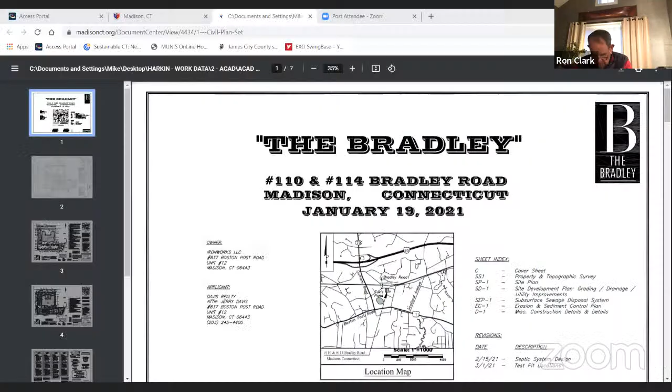So while Dave's popping that up, I'll get started on it. So we're here tonight again for the project. It's called the Bradley. It's located at 110 and 114 Bradley Road in Madison, Connecticut. The owner's Ironworks LLC, and the applicant is Davis Realty.

And as you know, we have Mr. Jerry Davis on with us tonight. The civil engineering firm of record is Harkin Engineering LLC, my firm, and the surveyor of record is Gesick and Associates PC out of Clinton, Connecticut. There is a little bit of inland wetlands on the site, and the soil scientist of record is Mr...

The project site is located where the old laundromat used to be, next to the hearth, next to the dry cleaners, across from Hammonasset Fitness in that warehouse building.

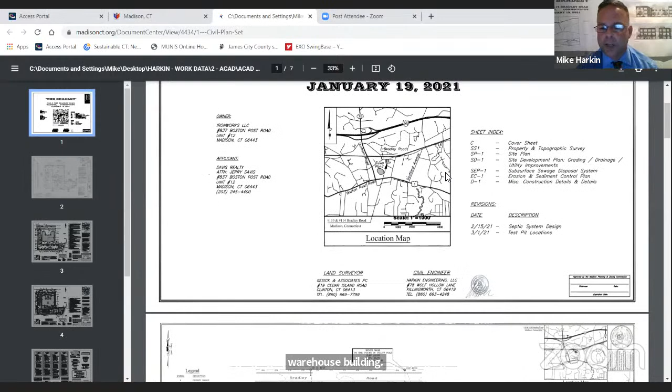If we go to the next screen, we have the site survey, which was done by Gesick and Associates. It shows the two parcels, 110 Bradley Road, directly adjacent to the hearth. You can see the outline of the hearth building on the left side, and then the rest of the buildings throughout the project site. There's a total of 4 buildings on the site right now.

They will all be demolished. The utilities and septic systems will be filled in. Because septic is the highest concern on the site, the leaching galleys will be completely removed, and the entire areas will be filled with septic sand to support the septic systems we need.

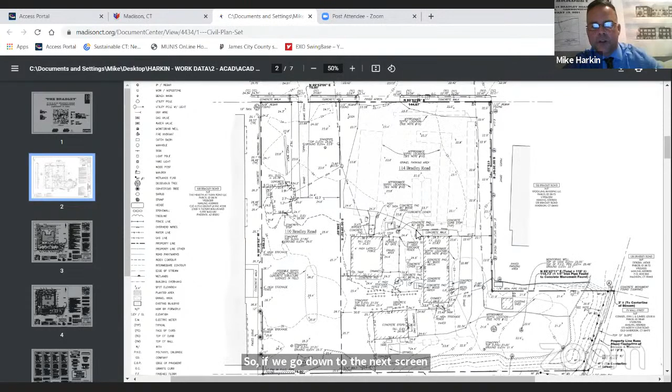To support this building, if we go down to the next screen, you can start to see our site plan. Our site, combining both 110 and 114 together as one parcel, equates to 1.43 acres, almost an acre and a half, which is quite a big lot, especially in the downtown area. It's located in the D zone, the downtown district.

For this project, I want to reiterate that we're here for a special exception. The building you see in front of you, since the Chairman had read the legal notice, was listed at 48 bedrooms. We've been going back and forth with the health department, and we're actually at 49 bedrooms now, based on the health department review.

As you can see, the building is almost centrally located on the site. The pad itself, first floor, is around 13,500 square feet. When you enter the site, you're entering on the left-hand side of the screen. It's two-way traffic, 24 feet wide, as we come off of Bradley Road. Then you'll notice as we come by, we have a small parking area with a loading space for things like UPS or Amazon.

Then you come around back, and that's where we've basically situated 90% of our parking. We don't have our parking up front. We want the artistic nature of the building to stand out. We have a lot of green space, and we didn't want to interrupt that nice vibe with all the parking, so we put all the parking in the rear of the parcel.

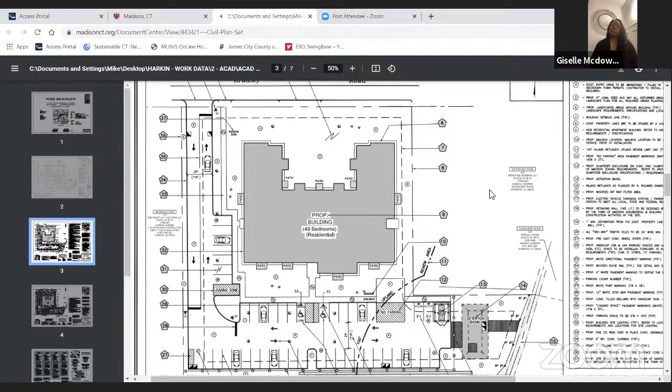As we go through, you'll see there's a sidewalk network that leads people from Bradley Road if they want to walk to the train station or just go out and about downtown. We have that interlocking sidewalk system. It's important to note that the building and site plan you see here meets all the planning and zoning regulations, the bulk standards as far as lot coverage, building setbacks, and things of that nature.

Now if we go to the next screen, this is our site development plan, and this is where you see all of our utilities.

Jerry had mentioned that the hardest part of any project downtown or anywhere on the shoreline is septic. You can see here we're supporting the building with 4 separate septic systems. Those systems have been reviewed by the Madison Health Department. Amanda has looked them over and asked us to make some changes, which we have. We've addressed all of Amanda's concerns, but because of the size of the septic system, it has to go to the state for comment, which it was sent up there. We don't anticipate any negative feedback coming back from them, but as far as a cursory review, once you hit a certain threshold, the state does have a shot to look at it. So that's where it currently resides.

If you go over to the right side of the screen, you can see where we're bringing in the gas and water lines, the utilities. It comes right down and heads to the back of the building. On the left side of the screen, we hug the building with the electrical and telephone. So underneath the ground it looks pretty tight, but we meet all the setbacks for utilities.

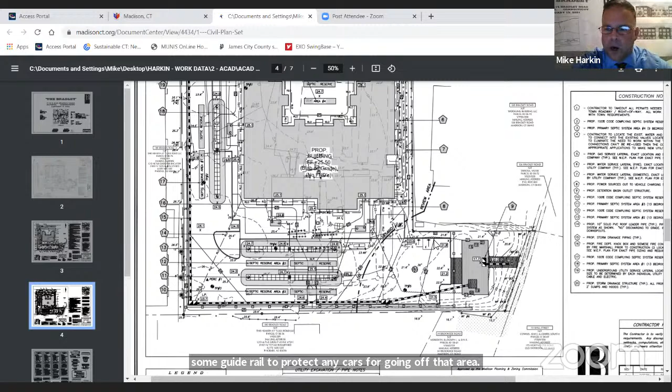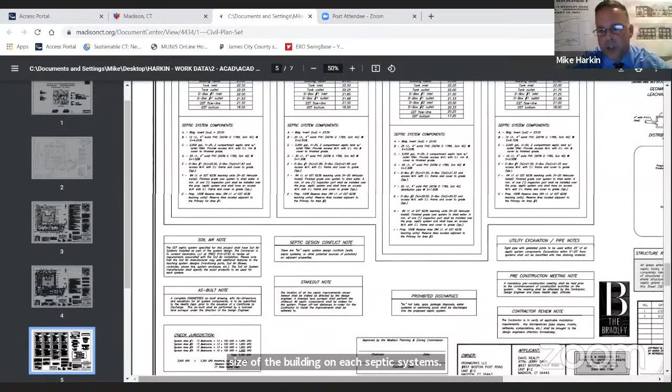If we go to the next sheet, Dave, this would be our septic design. It's a pretty thorough design based on the size of the building, with each septic system callout and physical septic type shown on this sheet. This is the sheet that Amanda and the Madison Health Department looked at and had us make a couple of small tweaks to.

The next sheet of our project plan set is the erosion control sheet. That's really one of the most important sheets in this project set. Usually it's kind of like the parsley of the plan set — there's a lot going on here.

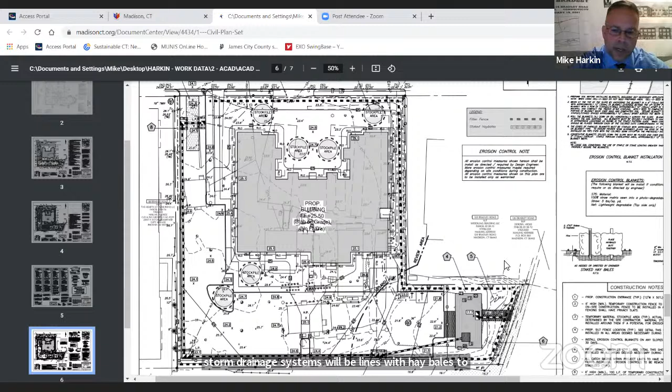Because it's in a high travel area, we have construction fence to be erected in the front and sides of the building to keep pedestrians from wandering onto the construction site. We have silt fence and hay bales located throughout — all the storm drainage systems will be lined with hay bales to keep any debris or silt from getting into the wetlands or the detention pond. We have areas for stockpiles, and a construction entrance leading out onto Bradley Road so we're not tracking any dirt onto the road.

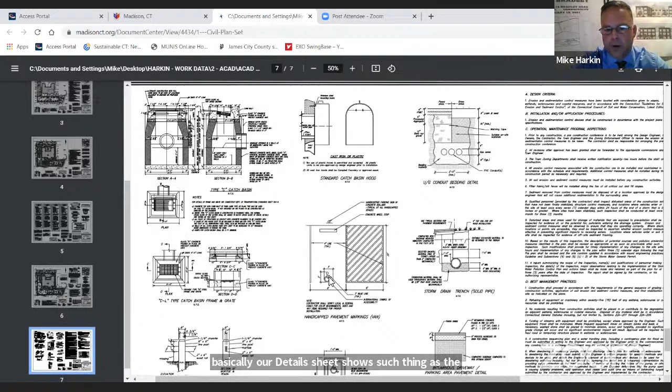Our last sheet in the project plan set is basically our detail sheet. It shows things such as the pavement requirements, handicap parking spaces, storm drainage, guide rail details, and things of that nature. Dave, if you can just go up to the site plan, which I believe is the third page of our plan set.

As you can see on our plan set, the driveway is tucked off to the westerly side of the project parcel.

I just wanted you to keep in mind, we do have our traffic engineer here to discuss the location of that. We went through a bunch of different scenarios on where to place that driveway, and this was by far the most feasible and prudent place for it, and it gave a good traffic flow through the site.

With that being said, I think the next thing to do would be to turn it over to our architect, Dan Chen. Before we do that, I just want to let you know that this project has been in front of ACA three separate times. We do have ACA approval on this building. And correct me if I'm wrong, Dave, do they get to look at this again one more time, or are we all set? No, they approved it as shown at the last meeting — they physically approved the plan set that Dan had put together.

So without further ado, I'd like to put it over to our architect, Mr. Dan Chen. Yes, hi, good evening everyone. My name is Dan Chen, I'm the architect principal with Barkman, Hendry and Archetype. Unfortunately Joe Barkman couldn't be here, and I was intimately involved with the project, so I'm happy to be here. I can start sharing my screen.

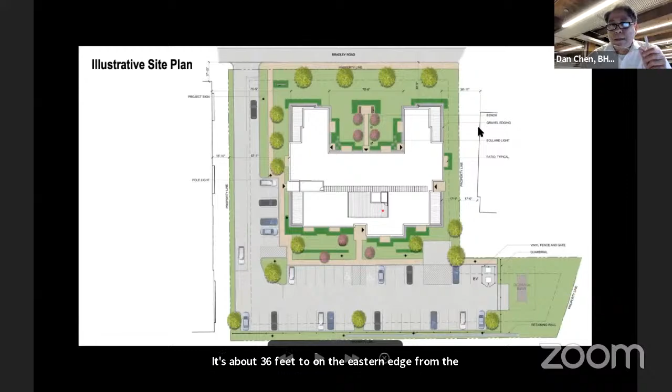As you come through, the majority of the surface parking is located in the back, along with utilities, turnaround space, and the main drop-off. The lobby into the building is from the southern side, from the parking. The building is approximately 75 feet from the nearest point of the Hearth, about 36 feet on the eastern edge to the existing 2-story retail space, and set back about 75 feet from Bradley Road to the main face of the central courtyard.

The landscaping, which our landscape architect Bill Brown will go into more detail on, is intentionally kept simple, in line with the look of the neighborhood.

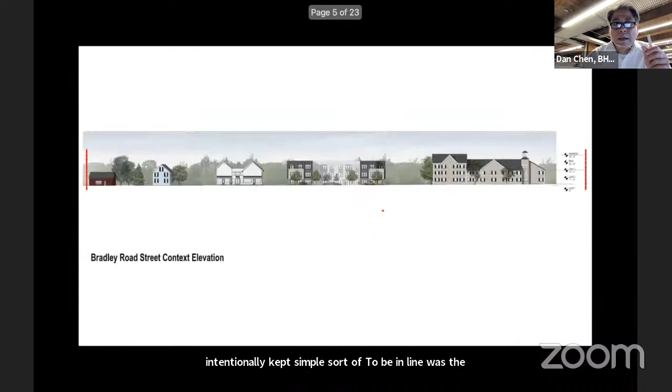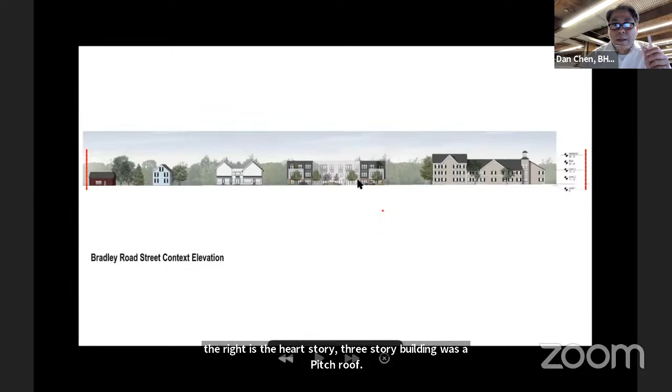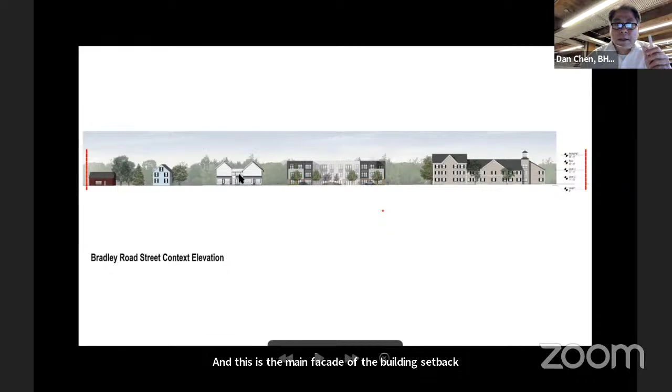This is a straight-on elevation from Bradley Road, to give you a sense of the height of the proposed building relative to the surrounding context. To the right is the Hearth, a 3-story building with a pitched roof. The proposed building has two wings, with the main facade set back about 75 feet from the property line. This is the 2-story commercial laundry adjacent, and I believe another commercial property here.

This gives you the approximate dimensions. We're 75 feet on the western edge to the Hearth, and about 37 feet to the 2-story laundry. The building width is 38 feet for the two wings, and the total width of the building is approximately 140 feet.

Some key characteristics we noted in our design approach: there's not really a definite style in this area, more of an eclectic richness and diversity, so we felt this design somewhat fits into that. The two wings break up the massing of the building facing Bradley Road, reducing it further, and the building is set back fairly far from Bradley Road.

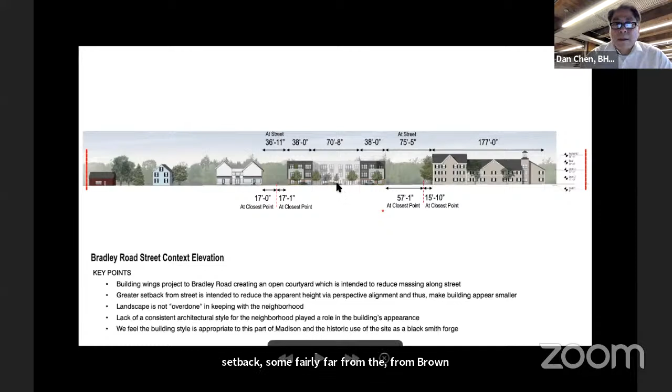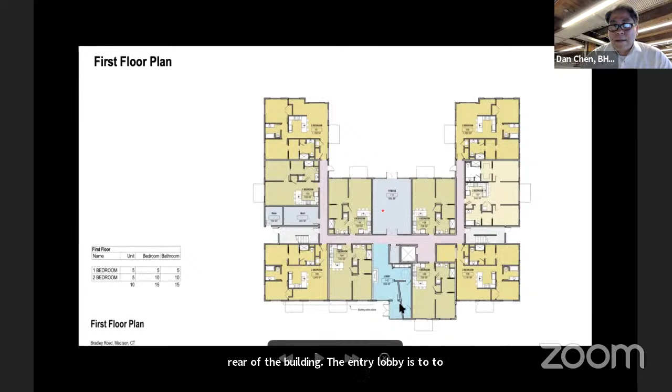I'll quickly go over the floor plan, without too much detail unless there are questions. We have 11 one-bedrooms and 19 two-bedrooms proposed. To orient you again, Bradley Road is to the north, this is the center courtyard, and parking is to the rear of the building. The entry lobby is to the south as you come in, with a community amenity space and fitness area immediately inside, which also gives access out to the center courtyard. The apartments are arranged around a double-loaded corridor.

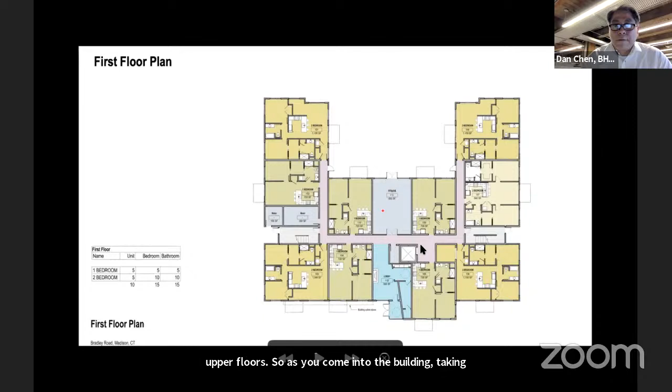The two-bedrooms are typically located on the corners of the building on the first floor, with utility and mechanical spaces to the left. The main elevators are here, along with two stairs taking you up to the upper floors. Taking the elevator up to the second floor, again the two-bedrooms are along the corners where the inside units are; these are two-story units, while this is a one-story two-bedroom, and this is the one-bedroom apartment.

As you come out of the elevator, there's a double height lobby area that you can look back down to. Many of the 2-bedroom apartments facing the center courtyard have outdoor balconies that overlook the center courtyard.

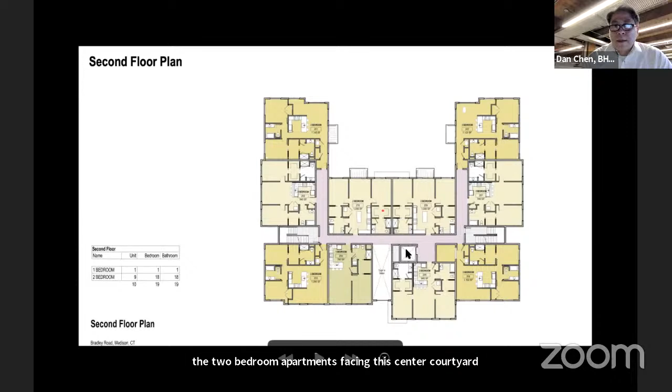As you come up further to the 3rd floor, the 10 apartments of buildings on the corners in this case are pulled back, and you will see that a little later in the 3-dimensional renderings. That creates a large patio deck for these apartments here. And the center 2 bedrooms have these outdoor balconies similar to the ones below.

There are 10 units on this floor, on each floor, for a total of 30 units and 49 bedrooms.

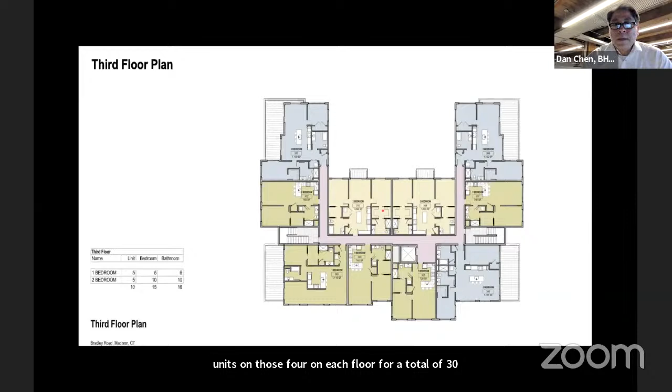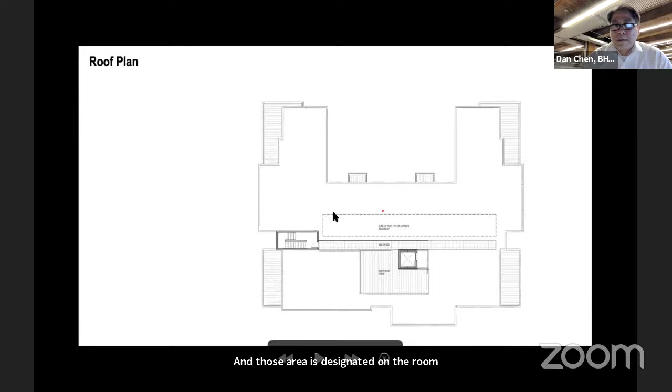As the elevator comes up, there's a communal deck of 735 square feet proposed, and one stair for the egress capacity coming up to this level as well. This area is designated on the roof for the mechanical equipment to service this building. These are pulled back from the edge of the building such that it further reduces the height and the visual impact to the surrounding neighborhood.

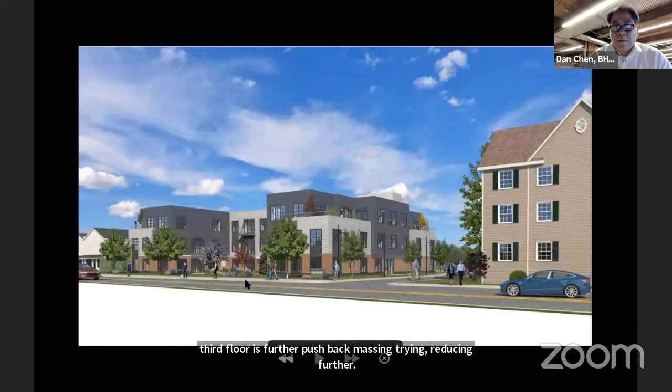As you can see, the third floor is further pushed back, reducing further the impact to Bradley Road. The center courtyard is over here, and the material here is trying to use a blend of different textures, materials, articulation and massing, interlocking volumes to reduce the mass of the building, and that is really the purpose of this design.

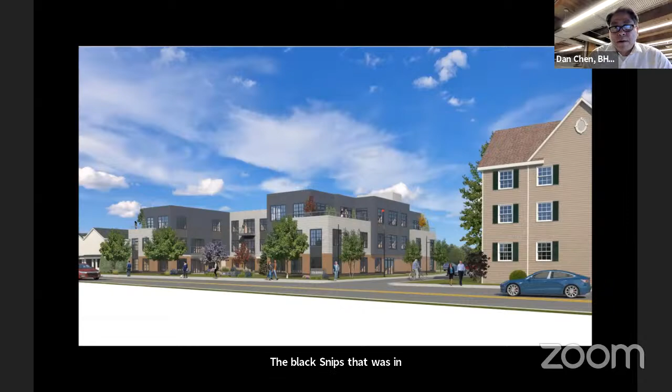The larger windows sort of harken back to the blacksmith that was on the site before, and since the intended crowd is sort of young professionals, we want to keep this light and airy.

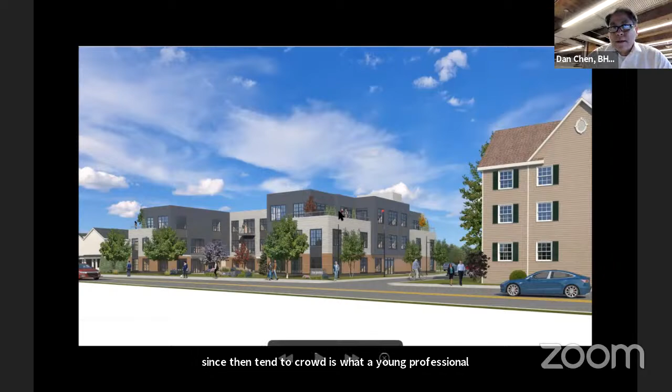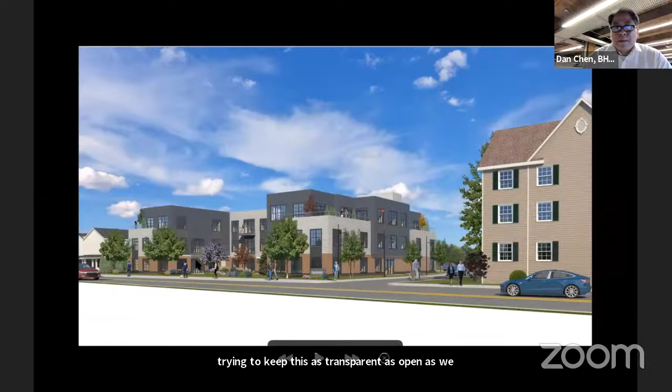The outdoor balconies and patios have a cable railing system that again is in keeping, trying to keep this as transparent or open as we can. The building holds these corners so that it participates in the urban context, but not overwhelming the street.

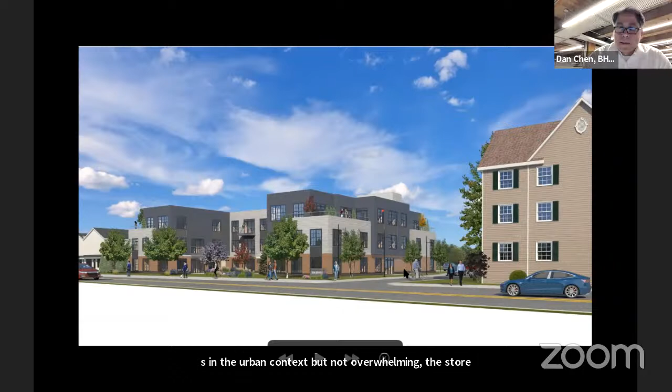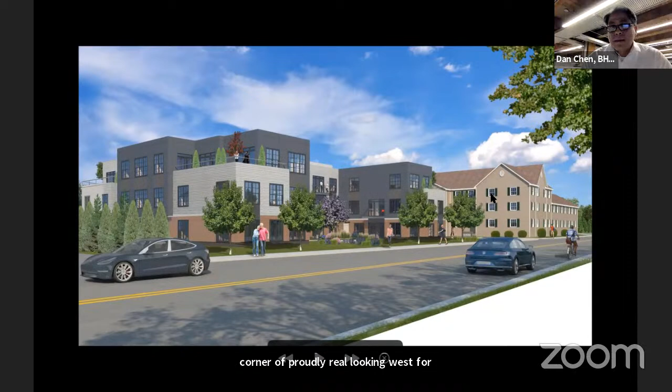This is a rendering standing on the northeast corner of Bradley Road, looking west for orientation. The hearth is in the back.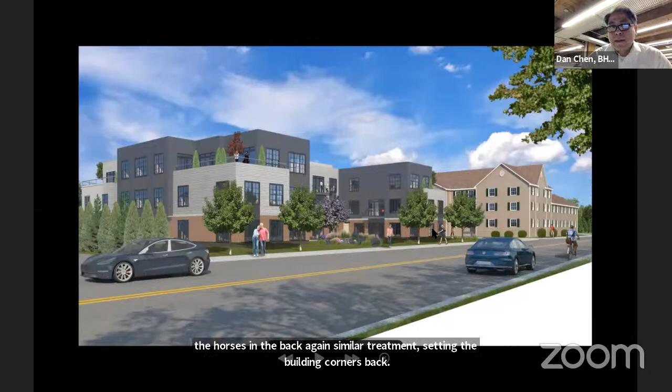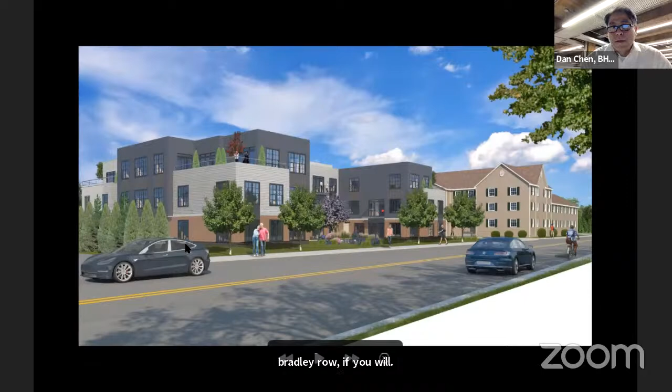Again, similar treatment, setting the building corners back, having the two-story wing at the articulation at the front of the building, the front of Bradley Road if you will. There, where the building meets the ground, there is a stone band or a ground face block stone band that meets and wraps all around the building.

Again, through using different colors and textures, we're trying to further articulate, but also break down the mass of this building.

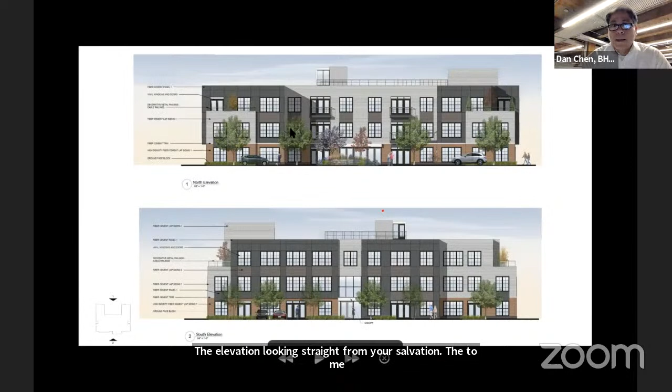The elevation looking straight from the north elevation, the two massing on the right and the center portion of the building, and this is the center courtyard.

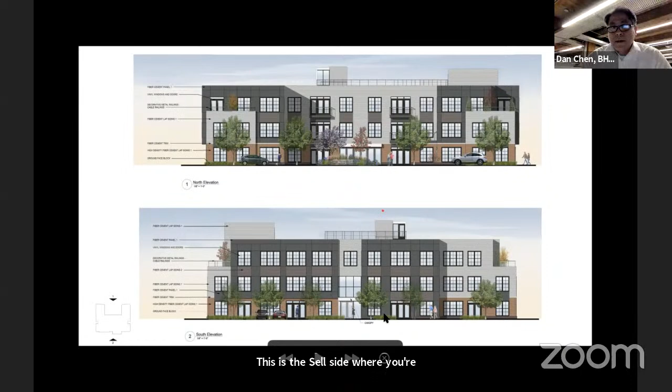This is the south side where the parking is, looking from the parking area. The main lobby, two-story, is here in the center, with the apartments surrounding that. There's a small canopy allowing for the entrance in this area.

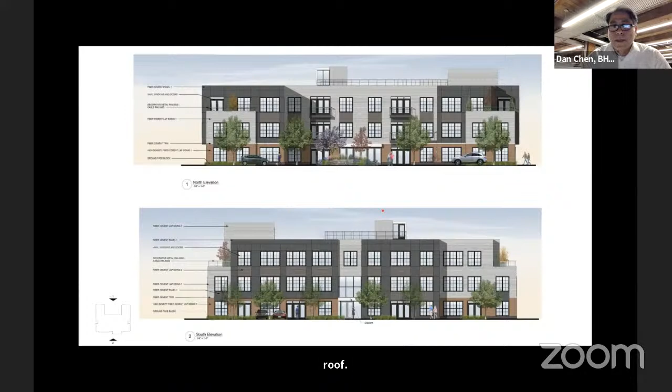What you see up here is the elevator overrun on top, the deck, and the one stair coming up to the roof. Again, the colored materials and texture are intended to break down a fairly large facade.

This is looking from the east side, and this is adjacent to the laundry. As you come in, the same strategy: articulation, the massing, the roof deck.

So it's again trying to use these techniques of massing, colors and textures to further reduce this large side of the building.

Same strategy on this west side. As you come in, this is the main road as you come through the lobby area here and the parking beyond.

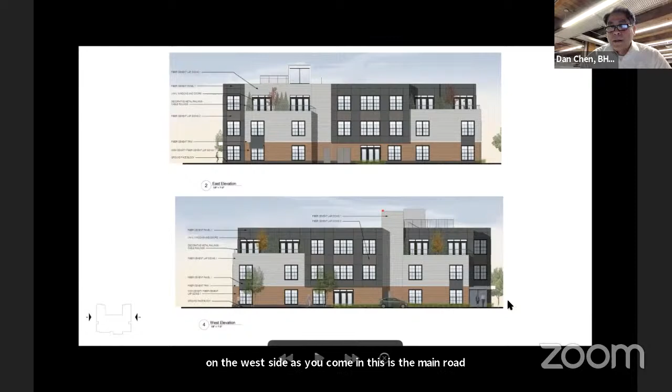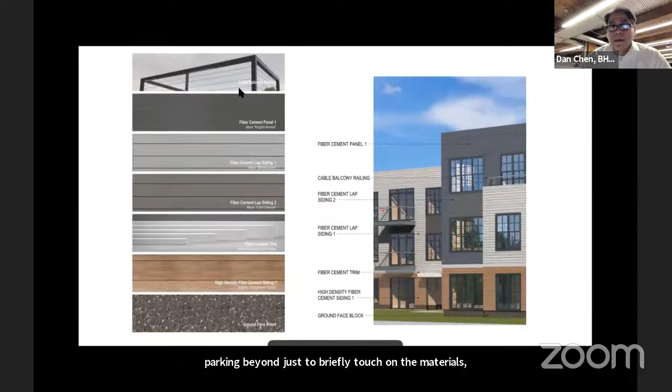Just to briefly touch on the materials, again trying to make this sort of light, modern and airy. The cable railing systems on the decks, a fiber cement system. This is similar to a common product as Hardie.

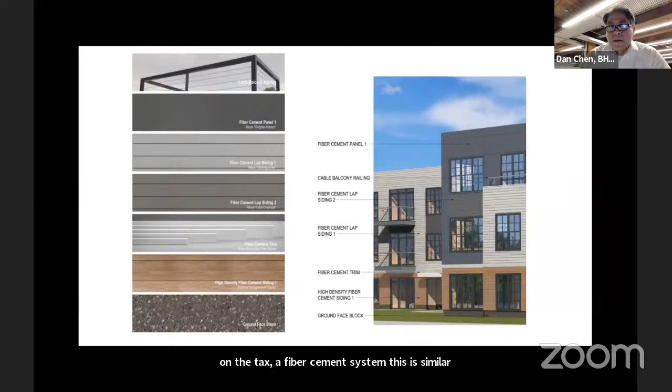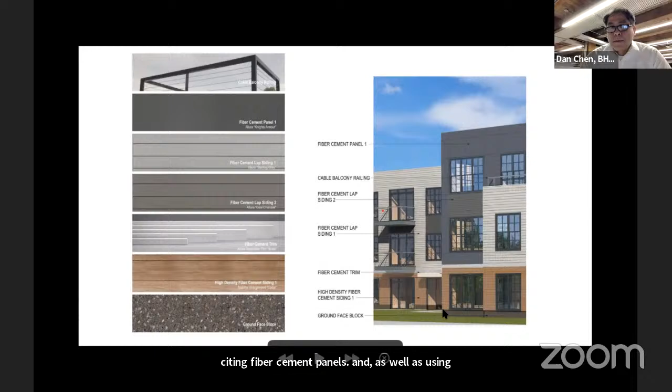We're using Allura here, but juxtaposing a panel and a lap siding fiber cement panels, as well as using different colors. And then where the building meets the ground, a ground block stone band that articulates the material of the building.

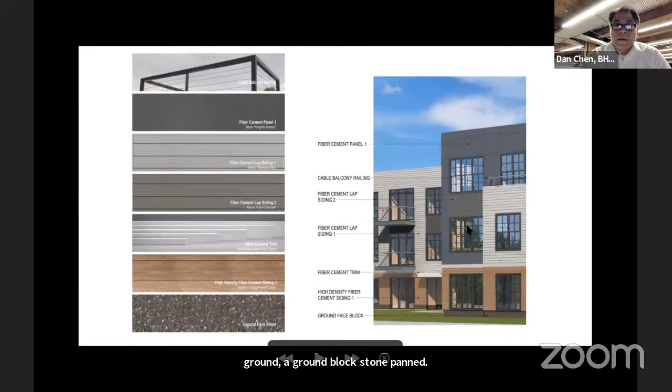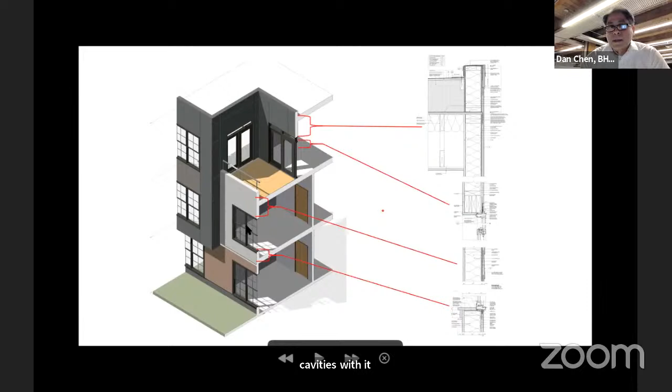This is really just to show a cross section of the building so you can see the intended thermal insulations. We intend to fully provide this, or for this building to be as energy efficient as we can. Cavities with insulation, continuous insulation, high thermal windows, and so on. So here, I will give this handover to our landscape architects, but I know I've gone through this pretty quickly, so I hope that when there's questions, we can come back to these and answer.

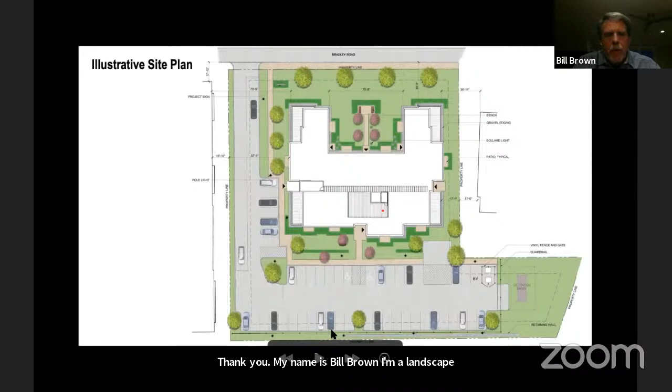As Mike said, we've gone through a number of meetings with the ACCO, and they do have a landscape architect that's on the committee, and this has been reviewed with them. Generally, when you're looking at this plan, the lighter green are grass areas, the darker greens are shrub areas, and you can see the trees that are evident throughout the site because they're a different color and they're round.

At the base of the building, we do have a stone band along the base of the building, and we have done that so that there is ease of maintenance along the base of the building in areas where, especially where lawn is going up against the edge of the building, it'll be easy to maintain.

On the street on Bradley Road, we have 4 street trees. Those are elms, which will get quite large. They'll hold the street, they're very beautiful trees, and they'll provide some screening for the building as well. As we go down to the left side of the plan, we are using trees along that edge, which are maple trees. In the back of the building, in the parking lot area, we're primarily using linden trees, and the flowering trees are shown in sort of the pinkish color that's shown here.

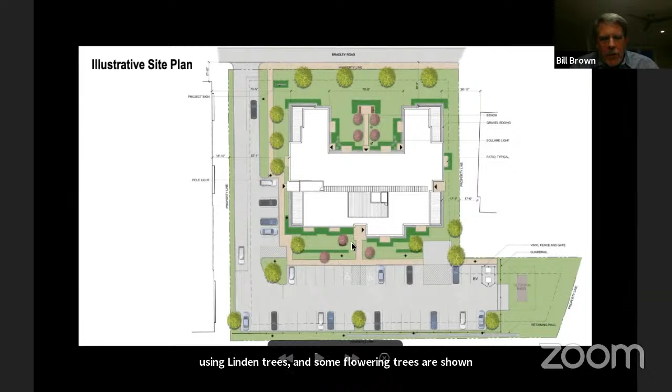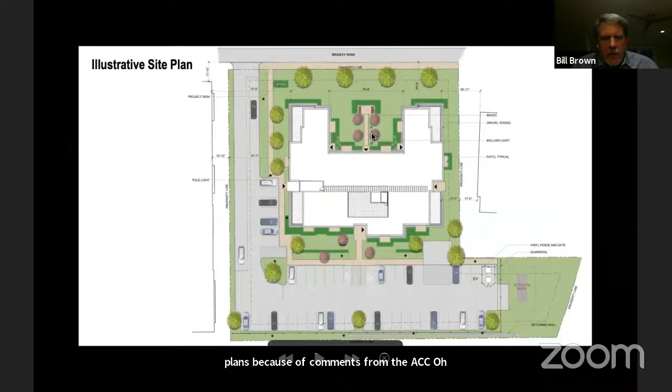The one change to this plan that is not evident on your plans because of comments from the ACCO is that we did add a tree at the bottom left in the parking lot. We were able to add a tree there because we had some leftover space for parking. And then along the parking area, between the parking area and the building, we added a hedge in order to block lights from the parking lot into the building.

As Dan mentioned, we have a nice courtyard as part of the project, and there is a door that comes out from the fitness room where there's a walkway that takes you to a space where there's 2 benches. It's actually large enough for 2 people to do yoga out there. You can also use the lawn areas to exercise and do yoga. I know that with the pandemic people are doing things outside, especially in apartments, much more than they did before, and we have provided that. There is a hedge along the Bradley Road side, so that we do give some protection there.

The shrub materials are really quite simple, and we really had to pay attention to the types of species of plants that we're using, especially on the north side because of lack of sun exposure. And the plant list has been reviewed by the ACCO's landscape architect, and he only had one suggestion that we change out one plant species, which we did.

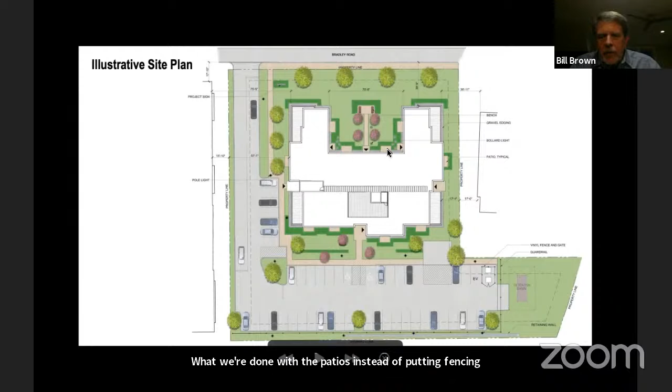Now, Dan also mentioned that we do have patios, and the patios are shown in sort of a beige color. What we've done with the patios, instead of putting fencing around them in order to get rid of that vertical element, is that we're using taller evergreen shrubs around the patio areas in order to screen them from the neighbors. Now, the next plan is the planting plan that was submitted.

It has a detailed plant list. I could go through the plants if you'd like, maybe later on if there's any questions. But the planting plan is fairly simple. When we do planting, we don't do 1s and 2s of different shrubs. You can see that they're fairly well organized, and the shrubs and plants are planted where there's masses of 8 to 10 in one before we change another species.

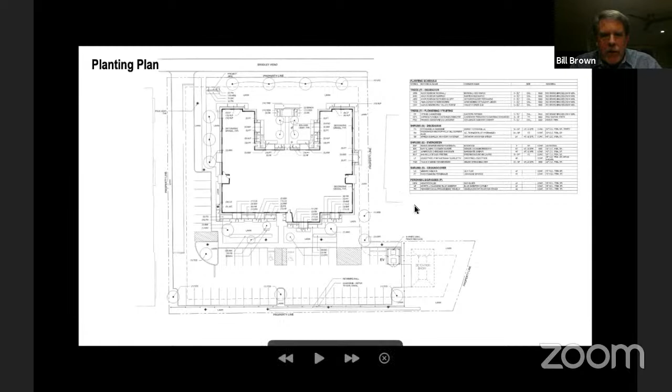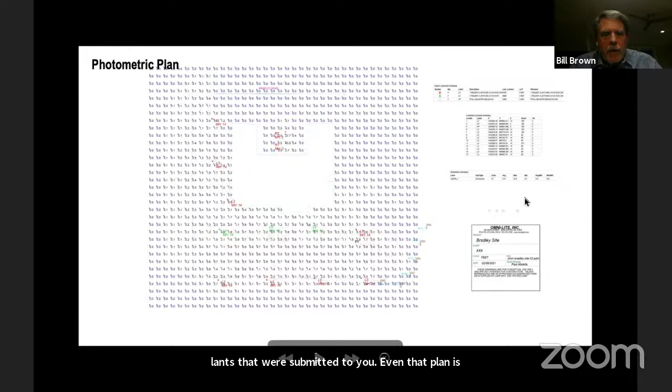Next plan. I know this is hard to read, it's easier to read in the plans that were submitted to you. Even that plan is difficult to read, but this is a photometrics plan that we provided for the project. And the next plan shows the lights that we're proposing. So the pole lights that are shown on the plan are shown on the right. There are 2 bollards that we're proposing to use in the courtyard area.

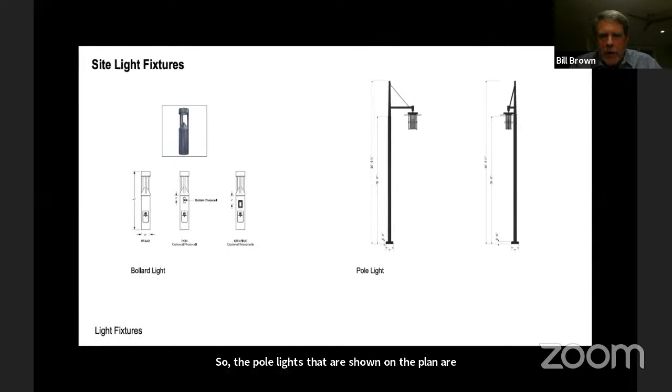And if you'd like me to, we could go back to the site plan. And you can see as you come in the driveway where the car is located, those dots are where the street lights are shown, or project lights are shown throughout the site. They give us adequate light. And then in the courtyard area, there's 2 bollards to give some light to the courtyard space.

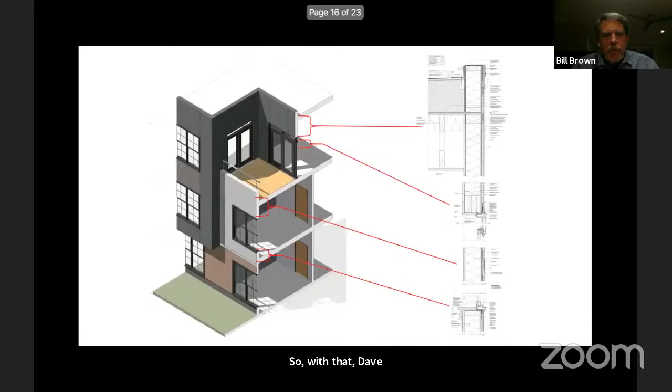So with that, Dave Sullivan is here from traffic, and he'll be presenting next.

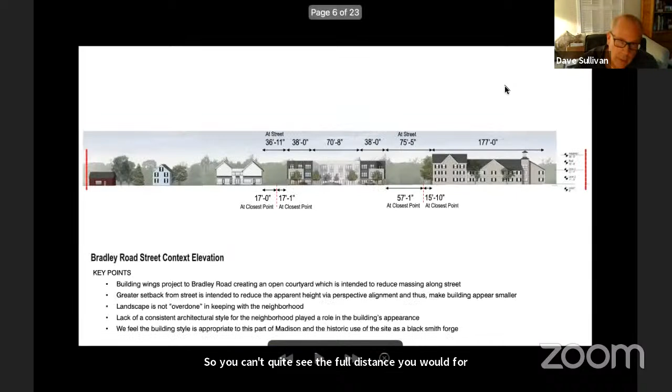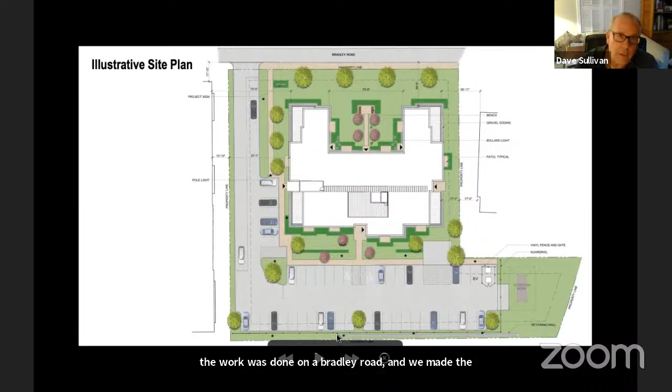This was before the work was done out on Bradley Road. We made the finding that once the stop signs go in at the intersection, those vehicles will be traveling significantly less than the posted or free flow travel speeds, and we think that in combination with the very good stopping sight distances, that would be adequate and safe.

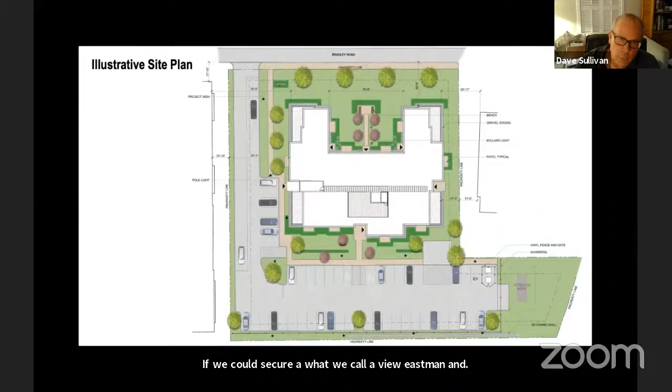We met with your staff out there and explained what we're doing, and they had a couple of suggestions. One was that in front of the hearth, if we could secure what we call a view easement, it would preclude them from, for instance, planting shrubs that would block our visibility. The second suggestion was, since the stop signs will be in soon - not knowing when soon was at that time - why don't we wait till the stop signs are in and find out what the real speeds are? So we went back to our offices and took that into account.

Several months later, the stop signs, crosswalks, and repainting were done. The easement was secured by Mr. Davis from the hearth, and as a bonus, a large tree in front of the hearth that had the ability to block sight lines was removed.

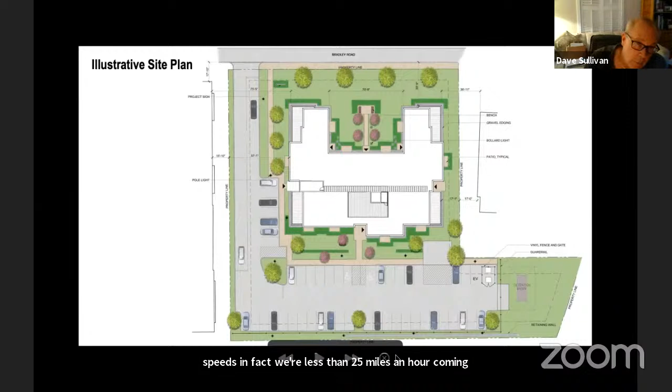So we went back and reevaluated it, and found that the travel speeds, in fact, were less than 25 miles an hour coming out of the stop sign. The 85th percentile speed, which is the speed that 85% of traffic is going at or below, was actually less than 22 miles an hour - it was 21.9, I believe. So we looked at our statistics there.

What we found was that if you're taking a left turn, you should be able to see 178 feet - you can see well beyond that. If you're traveling on Bradley Road and need to be able to stop if somebody comes out or takes a left turn in, you need only 130 feet, and you can see well beyond that. For the intersectional sight distance, which is for the 21.9 miles an hour speed, we needed 242 feet.

Well, we're about a car length short on that. But since we make the stopping sight distances and the turning sight distances, and we're only approximately a car length short on that particular factor, we met again with your staff, Rob Russo and John Inako, explained it to them, showed them the findings and the profiles, and sent them a letter documenting everything. Then in March, 20th of this year, John ultimately, finally, after over a year, said, I agree that as long as you have the easement and the sight distances you indicated, then I'm in concurrence with your findings.

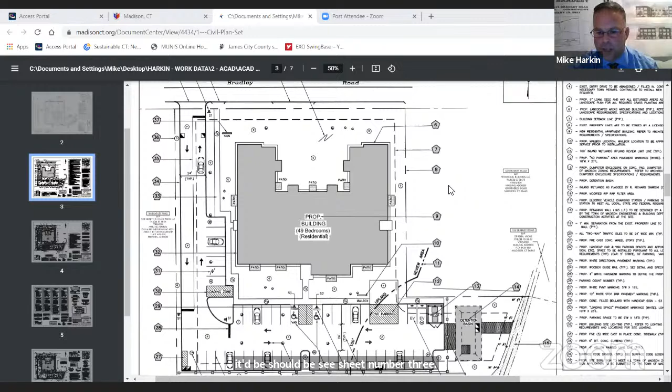I'll take the first question and turn the second over to Dave, our traffic engineer. Dave Anderson, can you pop up our site plan? It should be sheet number 3. If you go into the lower right section where our detention basin is, and over to the right, there's a very small area—you can see the wetlands flagging numbers and a small brook area. Then we have the 100-foot upland review area, that dark line in the center of the parking lot. We purposely kept the building outside of that.

I hope that answers your first question, Dr. Hay. Now I'll turn it back to our traffic engineer to discuss the driveway location. Yes, sure, thank you.

That's a good point, because that was one of the first things we looked at. If you look at Bradley Road in relation to this site, it's kind of a half-moon or frown shape, so moving the driveway to the other side runs into the exact same problem. The difference is you're not only crossing the property but going through areas that may or may not have parked cars—it's a parking lot, so it already has a function. Looking to the left, we could get an easement because it's really unused land in front of the hearth. Looking to the right, they'd have to agree to give up part of their parking lot plus an easement. So we did look at that early on, but it was not a feasible alternative.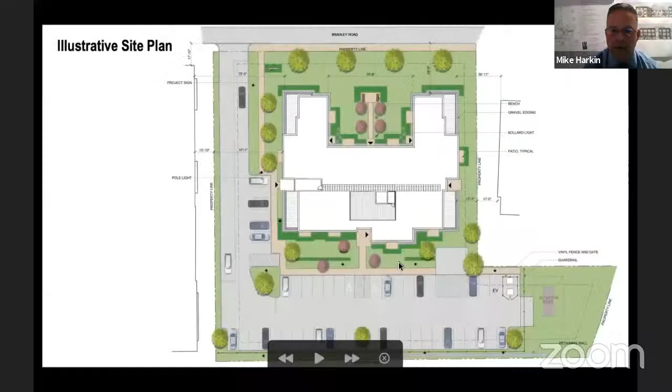I can double check that. They're over in the right-hand area. Okay, and just out of curiosity, I guess this would be for Jerry - are those going to be free of charge to the residents, or will they have a meter on them? I would expect they'll be free of charge. To be honest, I haven't looked into that yet. I know when we installed the one behind the movie theater years ago with ChargePoint, at that point they had a system for charging, and I haven't looked at these since then. But I prefer them to be an amenity, so I'll go with that. Okay, thank you.

Any other questions from the commission? Giselle, you're on mute.

So I have a question. My first question was answered, that was all regarding the parking spaces, so thank you for that. But my second question is about the driveway coming in—I'm certain it's two-way because that's the only driveway to get into the parking lot. What is the width of the driveway compared to what the actual width is supposed to be? To me it just looks a little narrow. I'm curious what the standard width of a two-way driveway is as opposed to what we have on your plan.

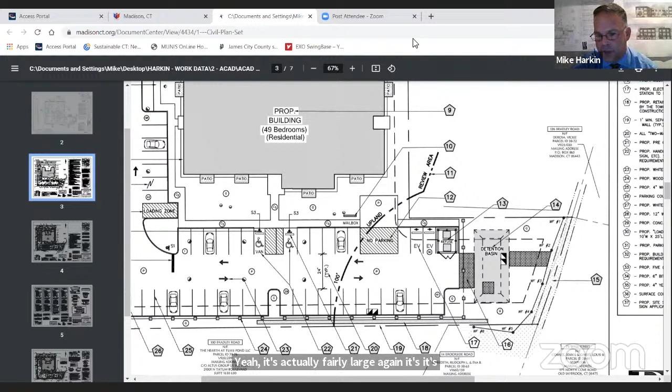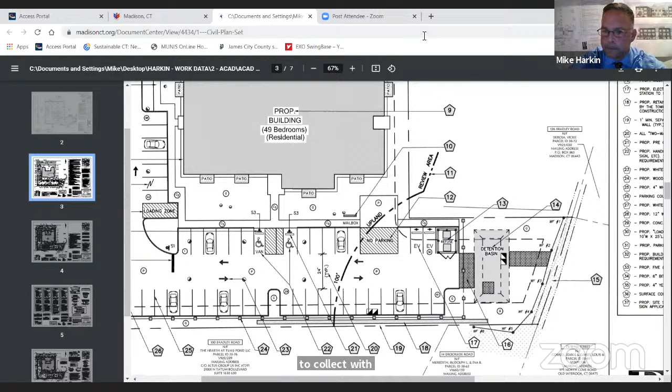And is that dumpster area adequate for 30 units? Yeah, it's actually fairly large—again, it's to scale. That dumpster area is about 15 by 20, so you can fit two large dumpsters in there plus the recyclables. This isn't something that's going to be picked up just once a week with a building that size. They'll have a garbage maintenance plan they'll put in place once the units are filled up, to figure out how much they need to collect. I hope that answers your question. Yeah, thank you.

Anyone else with a question? Yes, Giselle. Sorry, Giselle—go ahead. Just one more question: with the front courtyard and the aesthetics of the building, are you going to have any benches, a picnic area, a barbecue area? Are there any non-movable structures going to be on the plan?

Dan, can you pull up the site plan again? Yep, I will. So in the courtyard area, in the paved area out by the U, there are two benches shown there that are permanent. And as you come into the entranceway on the back of the building, there's a flowering tree to the left with a bench underneath there as well.

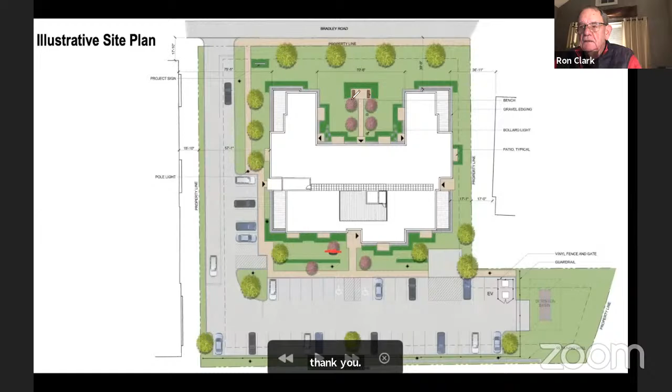Thank you. Thank you. And Dan, if you can leave that up real quick.

I just want to draw the commission's attention that we do have a site sign for the project. It's located up over by the driveway where Dan just highlighted in red. We do have a site sign that meets all the requirements. At the time of install, or prior to install, we will submit a sign application.

Thank you. Any more questions from the commission? Not at this point. This is a public hearing, so I would ask if there are any members of the public who are viewing tonight.

I'd like to ask a question about what we've seen so far. Please electronically raise your hand and ask it. Any hands, Dave? Yeah, we do. I believe it's David Kadamus.

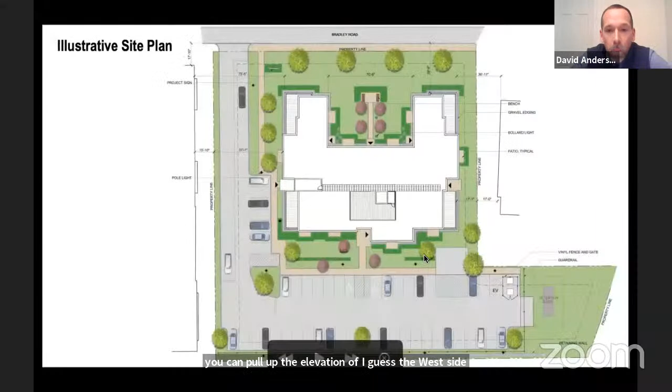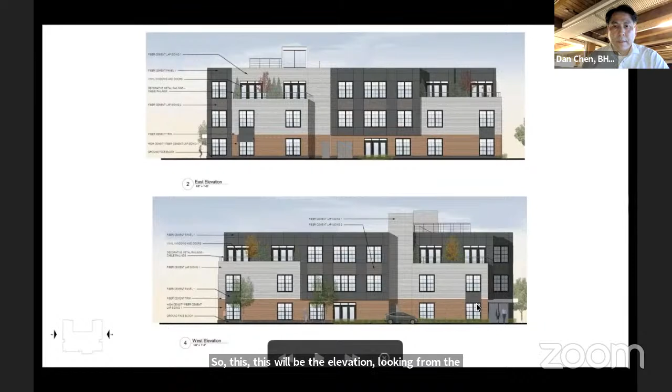David, are you looking for elevation? Yeah, I think if you could pull up the elevation of the west side of the building, that will be helpful. So this would be the elevation looking from the Hearth side on the west elevation, and the building is 75 feet away from the Hearth. Obviously this is a straight-on elevation. The perspective should also give a sense of the relationship between the building and the Hearth. This is standing on the northeast corner of Bradley Road, looking west, and what's beyond is the Hearth.

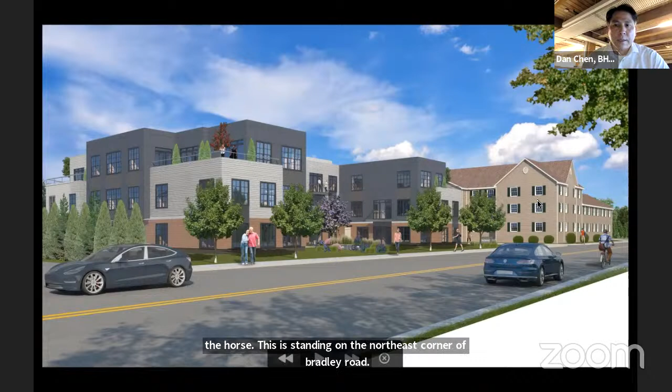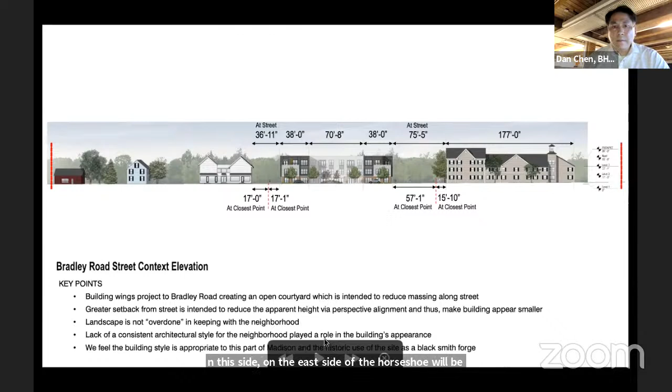So their community will be looking at the facade of the building. That's correct. And if I may go to the site plan, this will show you the Hearth on the right, and there's 75 feet between them. If she's on the east side of the Hearth, she will be looking at the west side of the facade of the proposed building. I see, that's troubling, but all right. Thank you, I appreciate it. Thank you for your question.

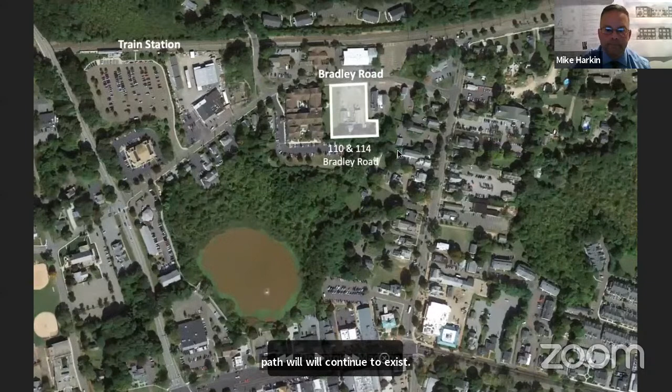And does that path that goes behind the hearth and connects over to Brookside, is that path unaffected by this project? Will it continue to exist? Yes, that is correct. Oh yeah, now I get it, I see it.

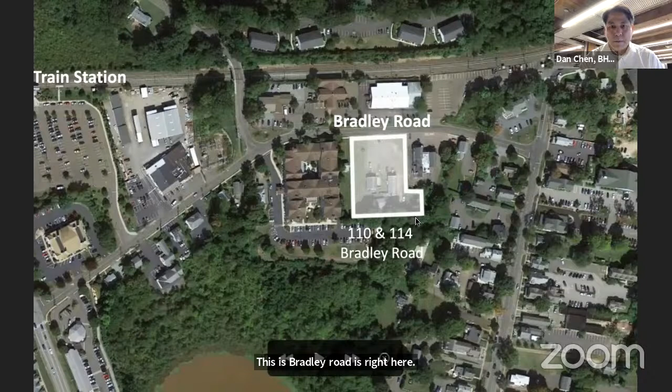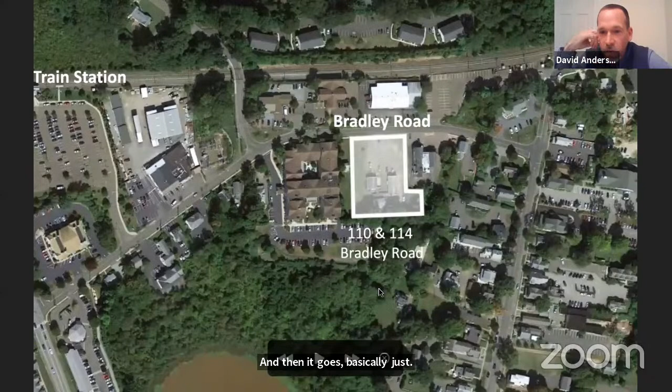This is Bradley Road, the hearth is right here to the west of the proposed parking lot. Do you see behind the parking lot, that little trail where your cursor is? Yeah, that's the path you're talking about. It goes along there and then almost due east from there you can see Brookside. So this really has no impact on that path.

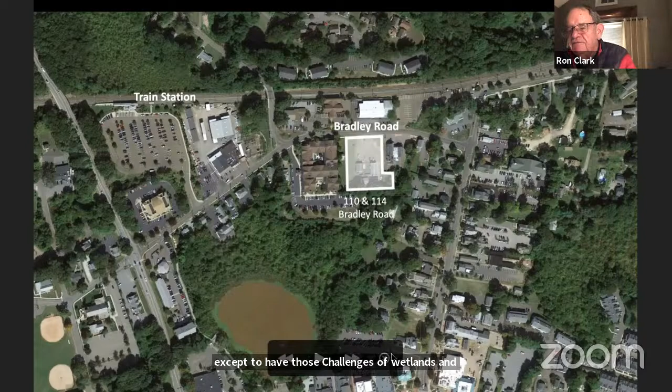And I think, going back to Dave Kademis's question, it's deceptive, at least to me. You'd think, knowing where Tuxis Pond is and where Bradley Road and the hearth are, that these buildings were much closer to the pond than they actually are. Wetlands and embankment issues aside, for eventual continuation of the walkway hooking up to Brookside, there's plenty of elbow room to do it, except for the challenges of wetlands and steep inclines. But it's not hard up against the pond, which is what you'd think without seeing an aerial photograph. Thank you for doing that.